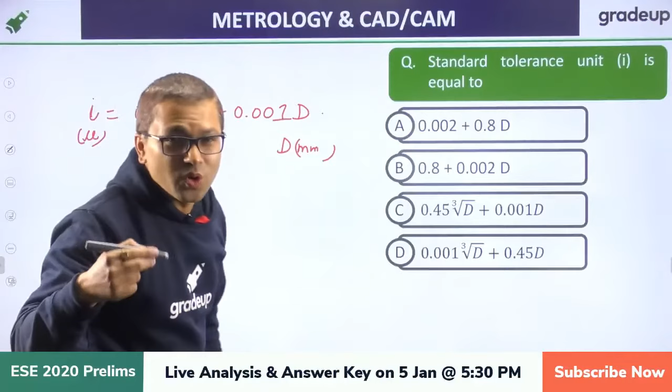Okay, so I said that i = 0.45 d^(1/3) + 0.001d, where i is calculated in microns and D is calculated in mm. Now there's a condition for this, okay, you should always know where this is applicable. So this is applicable only with basic size. Yesterday we were having a discussion about this, right, we talked about basic size yesterday. So this is applicable only when basic size lies between 0 to 500 mm, okay, please have a note about it.

And this will be equal to 0.004D plus 2.1 if basic size is lying in between this range. Okay, so please have a note about it, fine, please note this.

Yes, this is also applicable for gate. This is applicable for everything. Alright, most of you got it. C is the correct answer. Okay, fine, yes, everyone?

It's good if you remember these formulas at least, because these questions keep on recurring. Revu, I have answered your question. Karthik also says C. C is the correct answer as I have told you. Okay, fine, yes.

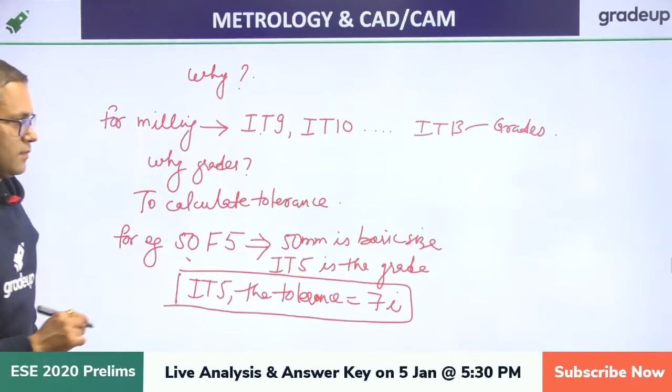Grades are just the suggestion for a manufacturing process, as I have given you the example. For milling, these are the suggestions, that's all. And for IT5, the tolerance equals to 7 into I. Okay, fine.

This F - capital letters are generally used for holes generally, but sometimes they use it for shaft as well. Won't capital, yeah, you're right. But sometimes, I was watching a gate question where they had specified it's a shaft, so they'll specify it. If they don't specify it, this means a hole. Yes, you're right, exactly. So if I say small f, then it's understood that it's a shaft.

So for IT5 the tolerance equals to 7i. That's why we were calculating I. It's very important you understand why do we calculate I. Yes? Is that good? Should we move ahead? Say yes if you want to move ahead. I think this is clear. Yes, small f should be shaft, you're right. Is that good? Fine, fine, fine, good, good, good. I hope you're really energetic out there.

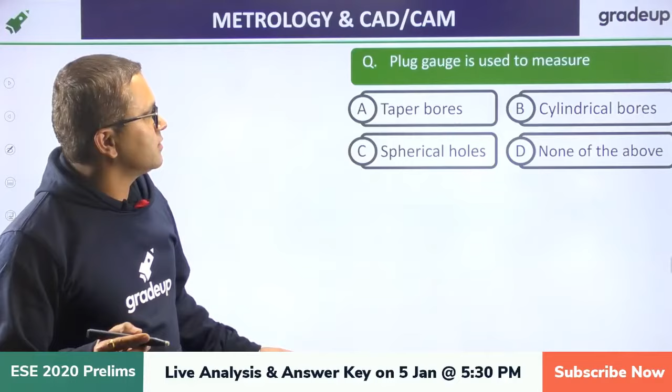Yes, okay. Plug gauge is used to measure - can you please answer this? Can you please answer this? B.

Let me show you a picture of plug gauge, okay? Then you'll be easily able to answer this. Plug gauge looks like this. Alright, yes? So what do you think it should be - taper bore, cylindrical bore, spherical holes, none of the above.

B, B, B. Karthik, I think I am not the right person to reply to this. I think the management should reply to this, okay? And yeah, I'm entirely new to this Gradeup company, and I'm doing whatever I can do.

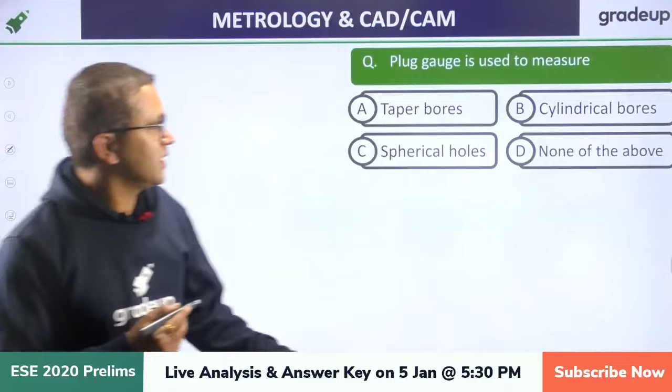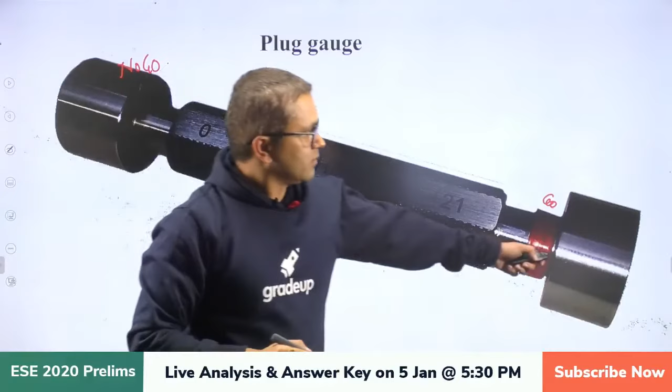Yes? Okay, B, B, B, B, B. People are saying C also. See, I had shown you this plug gauge. One end should be a go and yes, both go and no go in one plug gauge, it's possible. Okay, let's say this is go, this is no go. So what do you think should be the profile of the job that can be tested using these?

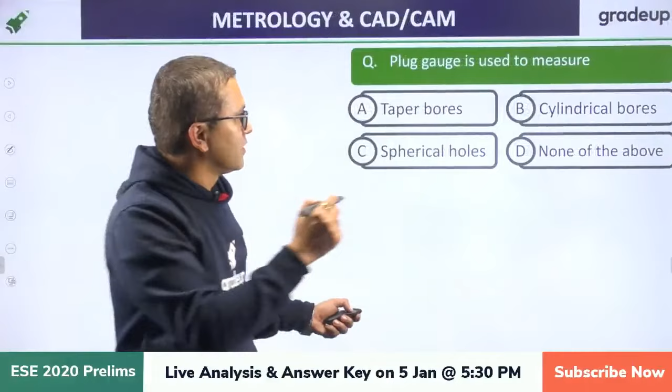It should be cylindrical bores. Bores are nothing but holes. Generally bores equals to holes - there's another name for holes that's called bore, generally speaking. Yes, Abhishek, both go and no go in one. Yes, wear allowance will be given in go only because it's in the contact. It goes inside and it takes on the wear. So wear allowance on the go only. Okay, fine, yes. So cylindrical bores is the answer.

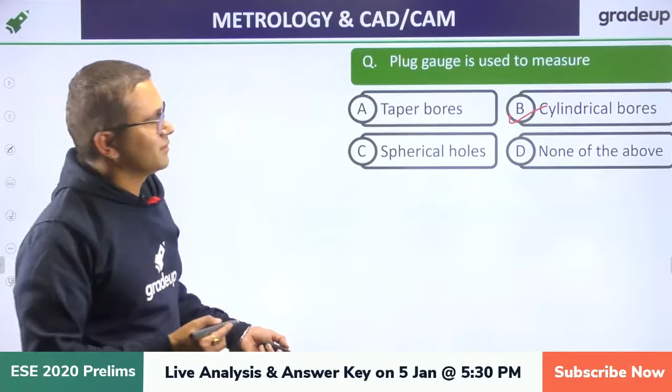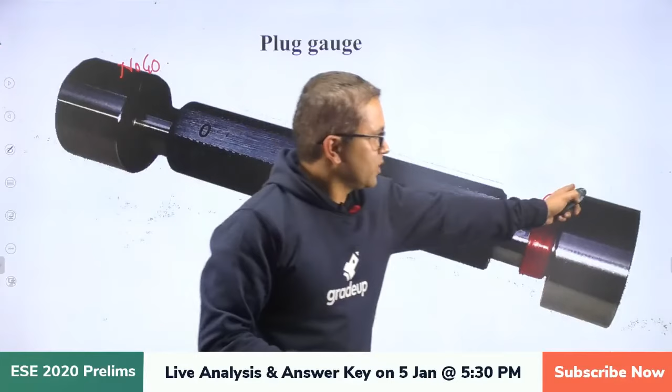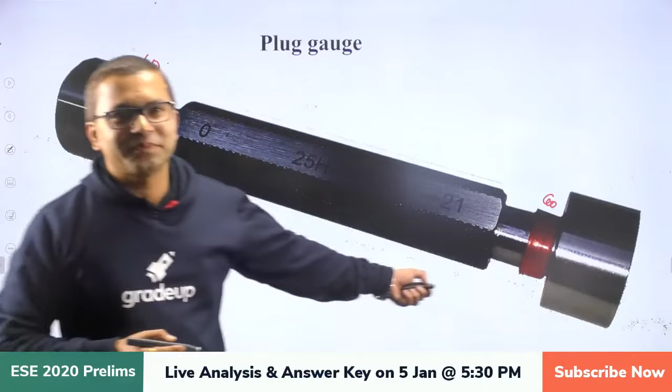So spherical holes - see, it looks like this. The profile, Deepak, I am answering you. Okay, if the profile would be spherical instead of cylindrical, then it would go inside a spherical hole, right? Yes or no? This is very logical, right? That's why not C. You're saying spherical holes, it doesn't look like a sphere to me, it looks like a cylinder to me. That's why I have included the picture. That's why we say B. Okay, I hope this is clear.

Sharmila says shaft, Deepak says dia. Difference between dia... okay, fine. You say thickness, OD, yes, good, thickness. Roundness, external dia they say, spherical, thickness, okay fine. When you look at it, I'll take thickness and outer dia. But generally snap gauges are used to measure outer dia of shafts. But yes, you're right that it looks like thickness can also be measured using this.

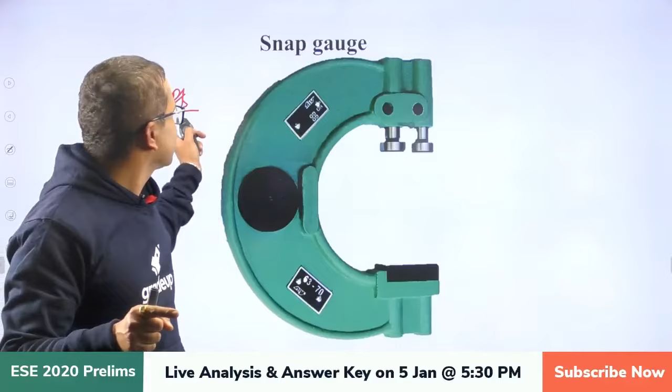But looking at this profile, this is used for external dia of shafts. So please remember, snap gauge is for shafts, not for holes. Can a hole be checked in this? No, right? Because of the profile.

Remember this, just take this picture in your mind. How does a gauge look like? It will be really easy for you. Okay fine, yes you are right, all of you are right. Saurabh, Abhishek, Mageshwaran, Sharmila, all of you are right. I congratulate you, you're doing really great. Fine, good, Sachin.

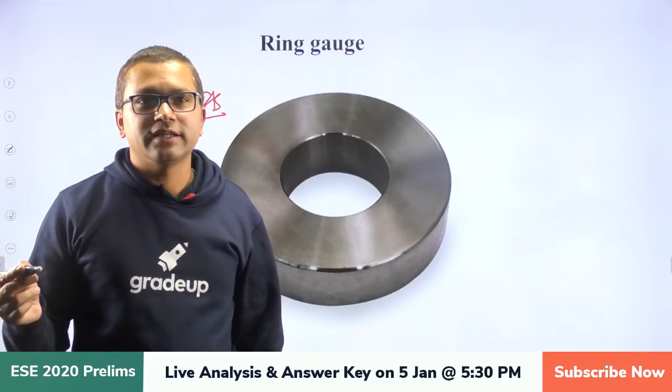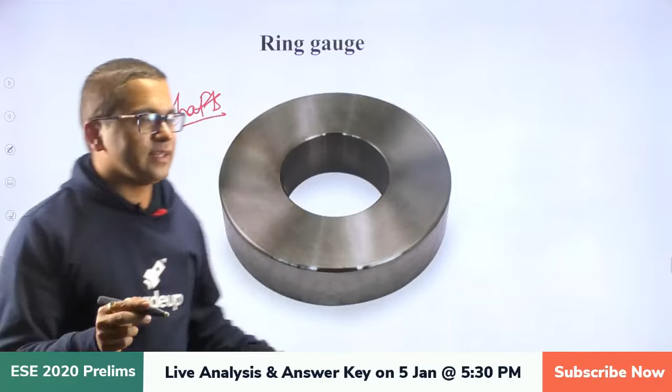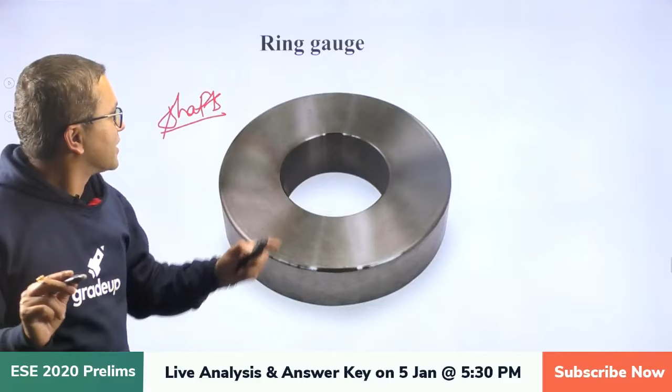Internal dia and outer dia. Okay, you're saying internal dia, okay fine. Internal dia can also be measured, right, using this? Okay fine. So just keep this in mind that this is used for measuring the diameter of shafts, exclusively it's for outer diameter. But this way, if I tell you that this is the ring gauge exactly, so maybe you can also measure internal dia.

I just want you to understand that whenever we are talking about gauge, we are not measuring it, we are checking it. This is a very important concept. Okay right, so we can say that pitch and all needs measurement, but here we are just checking it, that the job is correct or not.

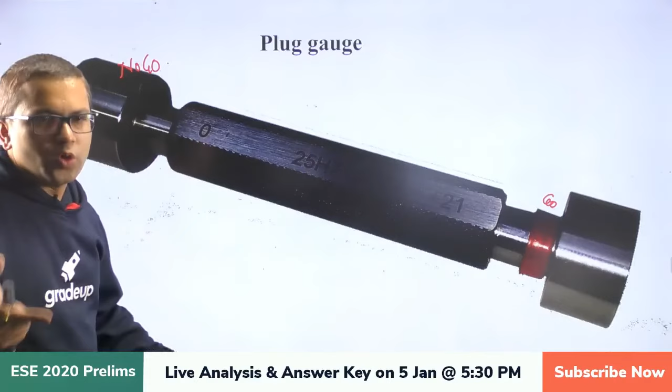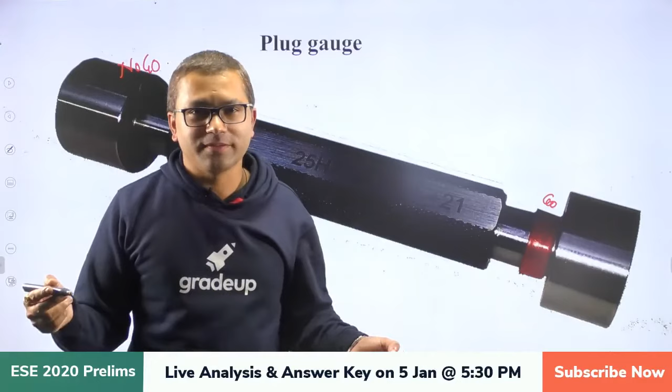For example, let me go back to this. Okay, for a hole, if this goes inside, we say that it's acceptable. And simultaneously, if it doesn't go inside, we say that it's acceptable too, right? This is what we say, this is the only condition. So we are not measuring anything, we are just checking if the manufactured product is acceptable or not. Fine? Yes, okay.

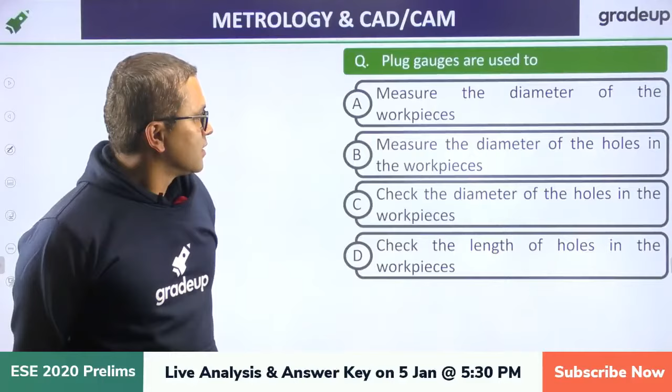Plug gauges are used to... now can you please give me the option? C, okay. No Abhishek, as I told you, we are not measuring anything, we are just checking. Gauges mean that we are just checking it, we are just finding out if it's acceptable or not acceptable, that's all. Gauges are made just for this, for the sake of elimination of measurement, that's all. Okay fine, yeah Abhishek, I have taken it from somewhere.

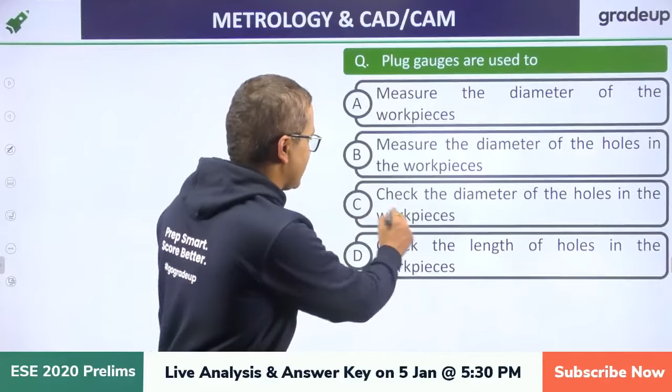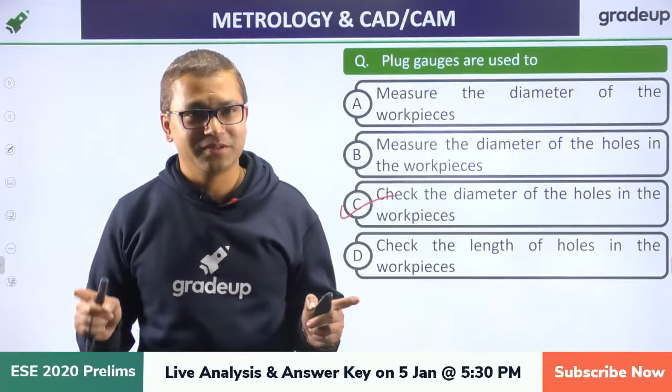It is a very common question, that's why we are discussing it. It's fine if it's asked in GATE. Okay, so yes, check the diameter of holes in the workpieces, this is a general answer. So everyone, I think you got it correctly, so congratulations, you're doing really great, fine okay.

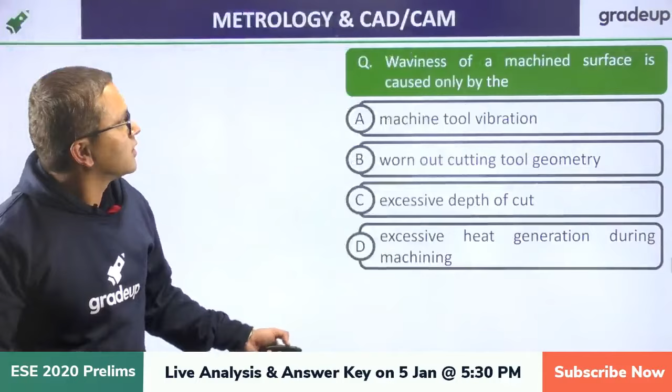See, just one point entered my mind right now. If you have not completed the course, this is another way of doing it. Firstly, you go to a question, do it, then dig more about it, find more information about it, try to understand more about it. All right? Yes? Okay.

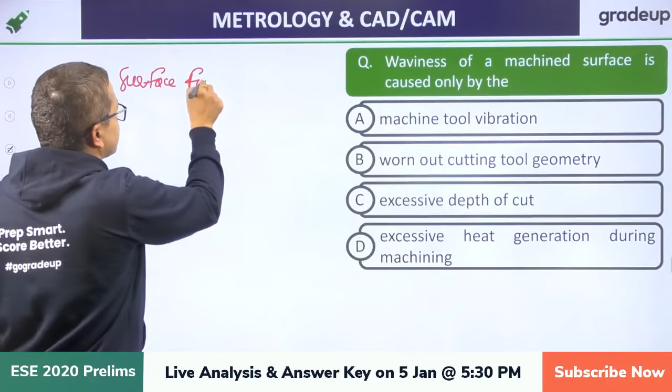Now, waviness of a machined surface is caused only by the, can you please tell me? When we are talking about surface finish, a surface can have waviness and roughness. So waviness is caused by which factor? This is what it's asking. So please come up. A. Okay, Deepak says A, Ashish says A. So those who are saying A, can you please explain why you think this will cause waviness?

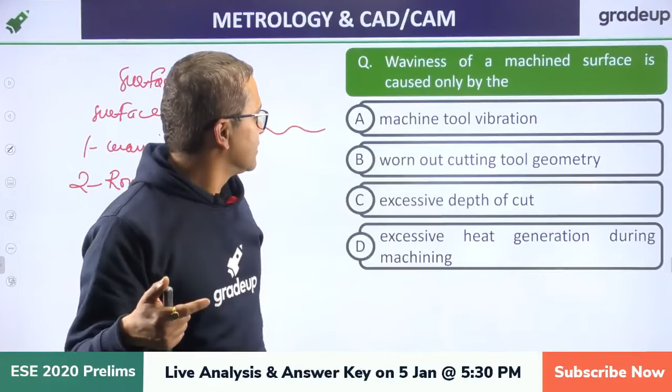Waviness means something like this, a profile, right? Roughness means what we call khurdura, not very smooth. Yes? So if you are saying A, if it vibrates, then what happens, Deepak? B. Bhaskar says B, worn out cutting tool geometry. Desh Raj says C, Dheeraj also says B. Shiva Gupta says A, it will produce wave.

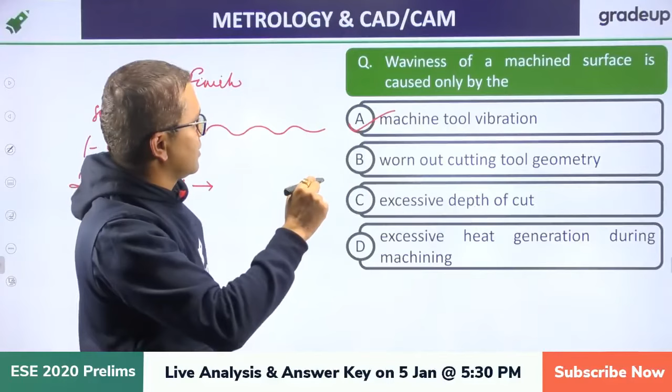Yes, Deepak, you are right. Good, I like that. You have intuition, being able to understand something with pictures. So this is going to be A, because let's say a machine tool vibrates like this. Actually it will be vibrating in all three directions, and that will cause this. Yes, Deepak, you're welcome. It's a good thing to have. So waviness will be caused by machine tool vibration. Is that good?

Now what about worn out cutting tool geometry? Worn out means the tool is not very sharp. A is the answer for the previous one. Are you getting this? So will worn out cutting tool geometry contribute to waviness or roughness? Please come up. Hiten says roughness, it will be rough. Dimensional inaccuracy, roughness. We are just talking about these two terms: roughness or waviness.

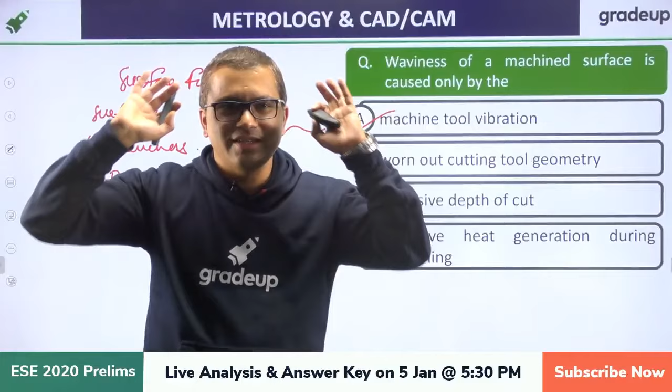It's very intuitive, common sense. When you don't have a very sharp knife and you cut something, let's say a potato, what will happen? It will be rough. Almost everyone is saying roughness. You're right, it will cause roughness. Now think about excessive heat generation during machining. Excessive depth also increases roughness, you say. Yeah, might be. Roughness is the correct answer for this.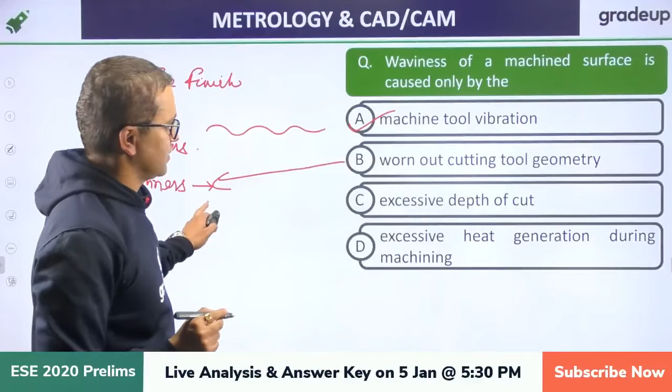Why am I telling you this? He's asking why it will be rough. For example, you don't have a very sharp cutting tool. The sharpness is not there, so it will tend to scratch it. That's why it will be rough. Roughness is the correct answer. So please try to understand the things. All right, what happens when excessive heat generation happens?

Built-up edges? No, just talk in terms of these. Can you relate excessive heat generation to waviness or to roughness? Built-up edges, tool deformation. Okay, those things obviously are going to happen. Tool life decrease, yes. So what happens to waviness or roughness? Just think. Change the properties, yes, you got it right. It will change the properties of material, Wasim, yes, good.

And then what happens? Actually, it will change the localized property of the material wherever the heat is happening, right? So what happens? It melts. Need not melt, but yes, the microstructure might change. So because of microstructure change, what might happen? It might become brittle. Okay, you're heating it and suddenly you're cooling it. Yes, so brittleness will cause what? It will cause roughness again.

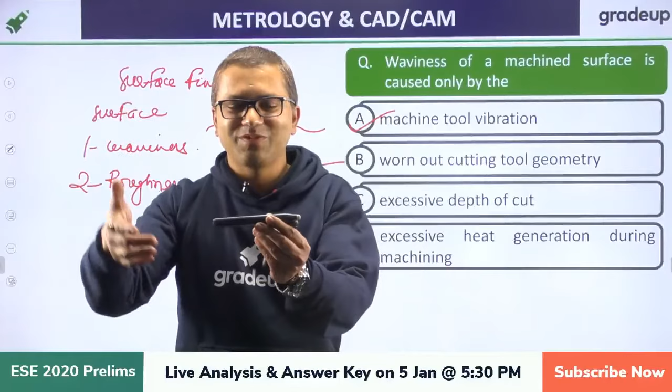Yes. For example, I heat this marker locally, just at one point over here, or at the circumference. What do you think will happen to it? Will it become rough? Try to take examples from real life. I'm going to heat it in the circumference like this. Will it become wavy or will it become rough? It will become rough, right? So please correlate. Whatever way you are able to visualize it, please correlate. So the answer is going to be rough.

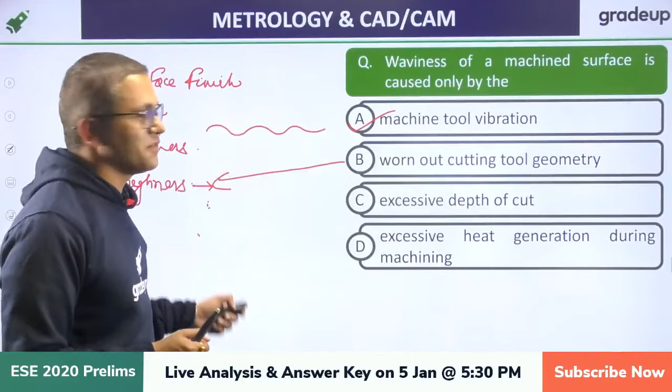So understand everything intuitively. Otherwise, it will become really difficult here in production engineering to get to the right answer. Fine? Radial contraction and all, you are saying that, but I just want the answer in terms of waviness or roughness over here. Fine.

So, Abhishek, as I have told you, we don't measure something using gauges. Those are dial indicators that we use. Are you getting this? We are not measuring anything using a gauge. We are just accepting the job or rejecting it. That's what it is, Abhishek. Okay. Yes, it becomes rough. Fine.

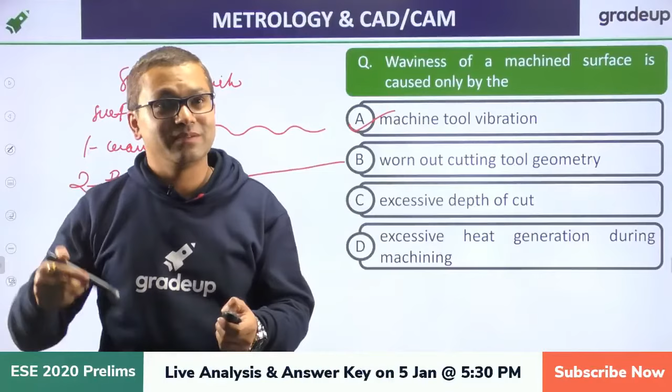Okay, Abhishek, I am glad that you are getting it. But you need to stick with your theory. If different books are giving you different options and answers, you have to be with yourself, with your theory. That's how you understand it. Yes, Deepak, I'm really sorry, you got stuck up there.

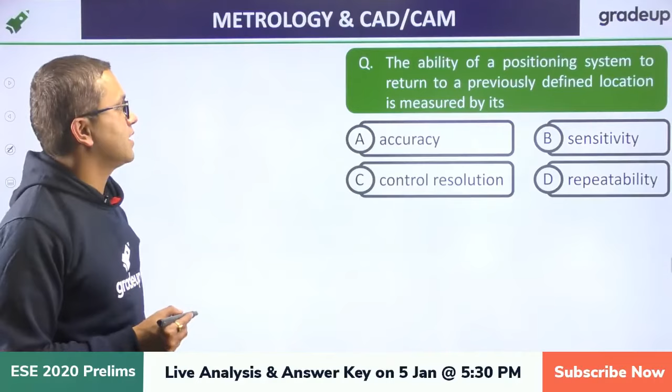The ability of a positioning system to return to a previously defined location is measured by its... Now, please, I want answers for this. Positioning system to return to a previously defined location is measured by its... Now it's going to be a trickier one. So please write in your answers over there. Let's see how we do.

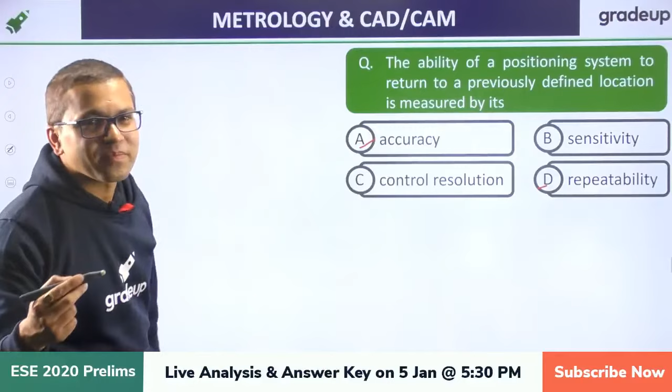Is it accuracy? Lots of people are saying A and D. Few people are saying resolution. Control resolution. D, repeatability. Okay, fine. Most of you are in between accuracy and repeatability, right? So what is the meaning of accuracy? When do we say that something is accurate?

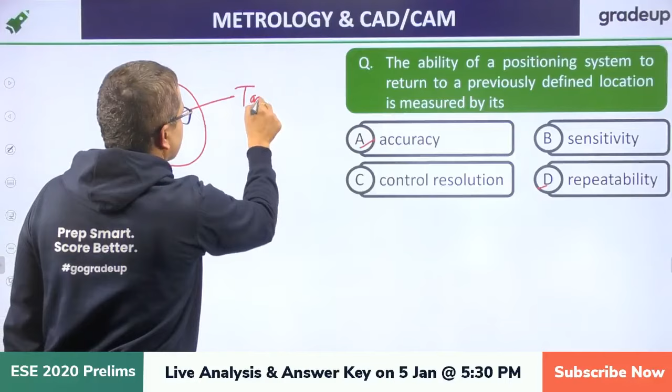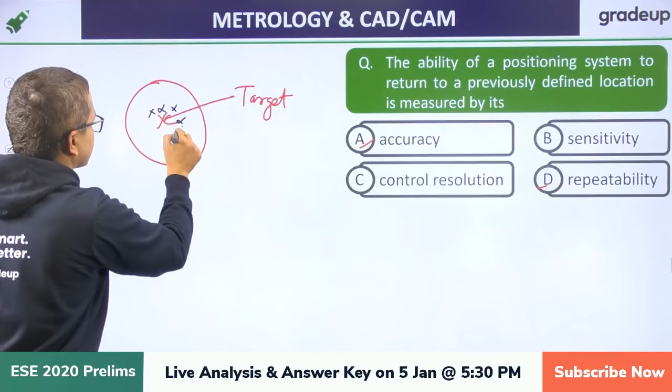Let's say this is the target and we are playing a dart game. The closer your dart is, we say that it's accurate. Yes, agreed. Now let's say this is again the target, but repeatability has nothing to do with hitting the target. Always remember this. Repeatability has to do with repeating the results again and again. This is repeatability. Yes.

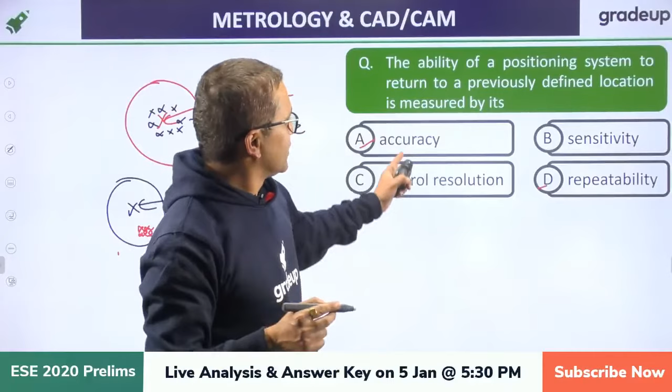Now you say how close to the actual value, that's why we have tolerance, Saeed. So it's not a very clean question, because the language is very confusing. 'To a previously defined location' doesn't talk about a target value. That's why it's repeatability. There's nothing like a target that has been specified over here.

If you assume that the previously defined location is the target, then you are going to take accuracy, right? How close to the actual value it is, that is defined by the tolerance that we give. That's why we have the concept of... okay, fine. Is that good? Yes.

Now let's start CAD. Let me give you one suggestion, because metrology is too much and you have to do lots of cramming in there. So go ahead if you want to cram things. For example, this job is measured by using this probe. There can be lots of cramming out there. There are very few basics and understanding in metrology. So please go ahead and cram them. The more, the better for you. Now let's start the concept of CAD.

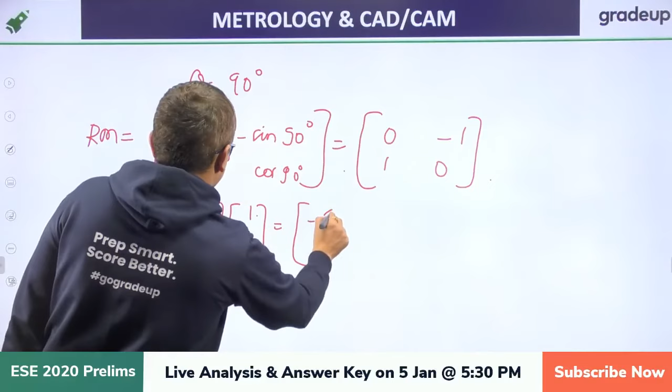I'm going to take this matrix 0 minus 1, 1 0 and 1 1, because this is the point that I need to rotate. Yes, 1 1 was the point here, 1 comma 1. So I have written a vector for 1 1 like this. All right, so what do we have here? -1 and 1. Yes, sign convention is that if you want to rotate it anti-clockwise, this is what we follow.

If we want to rotate it clockwise, then what do we do? What do we do? Yeah, this is for anti-clockwise. So for clockwise, I am going to write theta equals to minus theta. I am going to replace in this. Okay, so the rotational matrix is going to be cos theta, sin theta, minus sin theta and cos theta. Is that good? Yes?

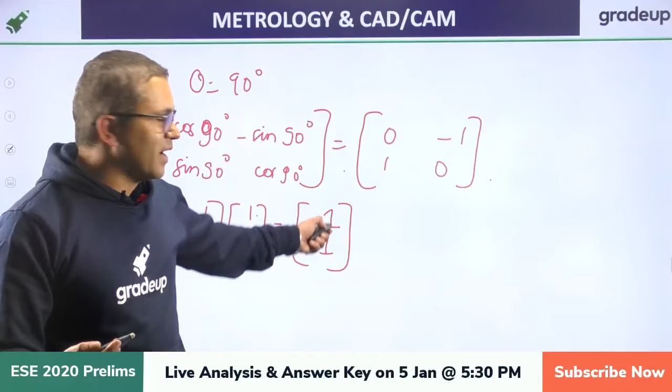Is that good? Yes, you can take the transpose of that. That is actually the transpose of this matrix. Is that good? Hello? So what's the answer? The answer is -1, 1. Not 1, -1. The answer is -1, 1. Okay? Okay, fine. Is that good?

Hello? Is that good? Now, we have to understand, when is this working? When is this working? So -1, 1 is the answer. It will work when we are trying to rotate a vector like this about origin O. This you need to keep in mind because the next question is going to be a bit tricky. I hope this is good.

Alright, so can you please read this and try to figure it out? Please, come on, come on. About P, you have to rotate by an angle alpha, all right? And sine alpha, cos alpha are given to you. The new coordinates of the vertex Q are. Now what? Now how do you do it? Can you please tell me how do you approach it?

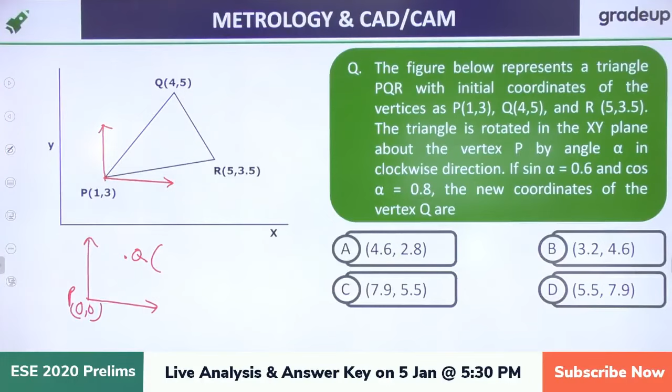Can you please tell me what should be the coordinate of Q with reference to this new coordinate system? Deepak says 3, 2, because from here, this is 1, 4, 4 minus 1 is 3. Yes, 5 minus 3 is 2. So Q will have this coordinate 3, 2.

So you need to rotate this Q in clockwise direction. Sin alpha, cos alpha are given. Sin alpha equals to 0.6, cos alpha equals to 0.8. So what should be the rotational matrix? Cos alpha, sin alpha, minus sin alpha, and cos alpha. Yes, because the rotation is in clockwise direction.

Okay, good, good, good. You are coming up, Sharmila and Varun. I really appreciate. Fine. So this is going to be what? Cos alpha is 0.8, sin alpha is 0.6, minus 0.6 and 0.8. This is rotational matrix. Now what you need to do?

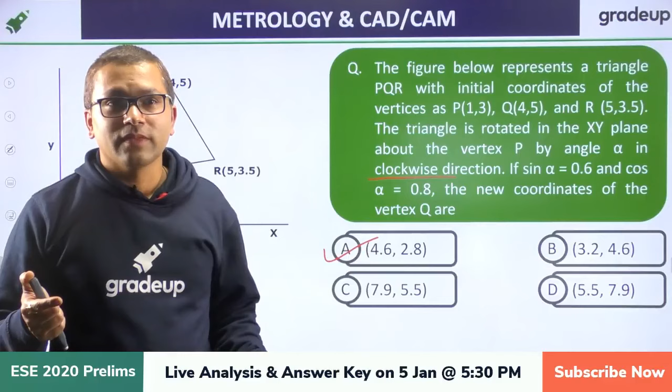Okay, yo Varun Sharma, I agree. Fine.